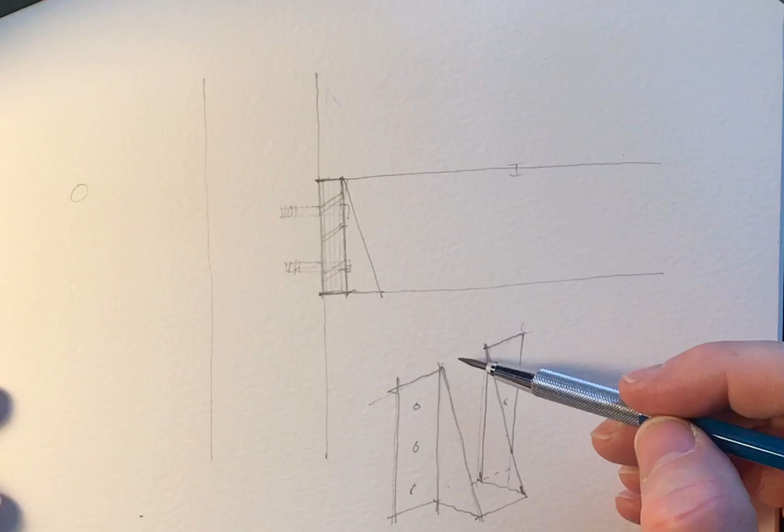And you may remember what a joist hanger looks like. It looks something like this. What it does is it creates a saddle that you can sit your joist into. So it could face mount onto this ledger this direction, and then you can sit your joist into this saddle, however it needs to sit. So that's what this is right here.

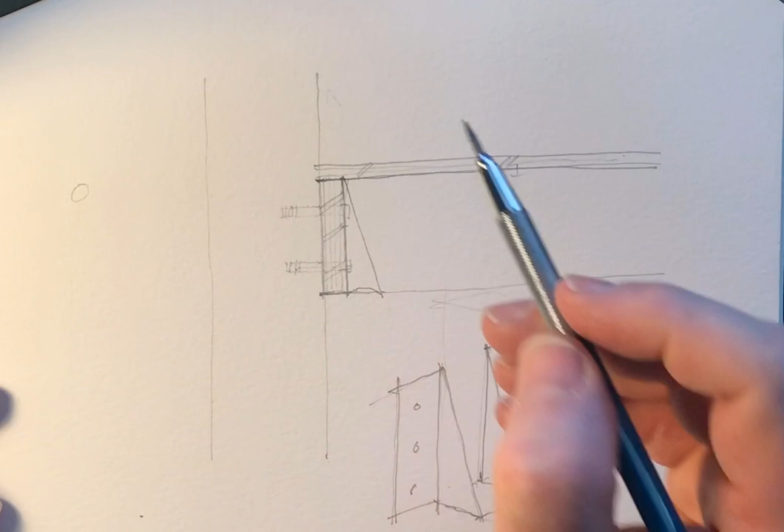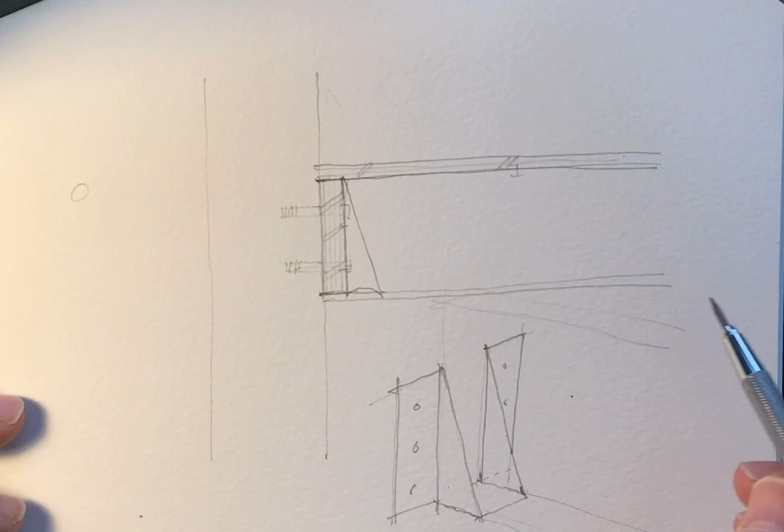On top of your floor joists, then you'll place either 3/4 inch or 5/8 inch floor sheathing, and whatever material you'd like to have on top of that, whether it's carpet or tile. Either way, you might decide that you want some sort of a ceiling material below. Could be gypboard, could be any number of things. If you want to lessen the sound transmission from the loft area or the upstairs to the downstairs, you may decide to put some sort of insulation in here.

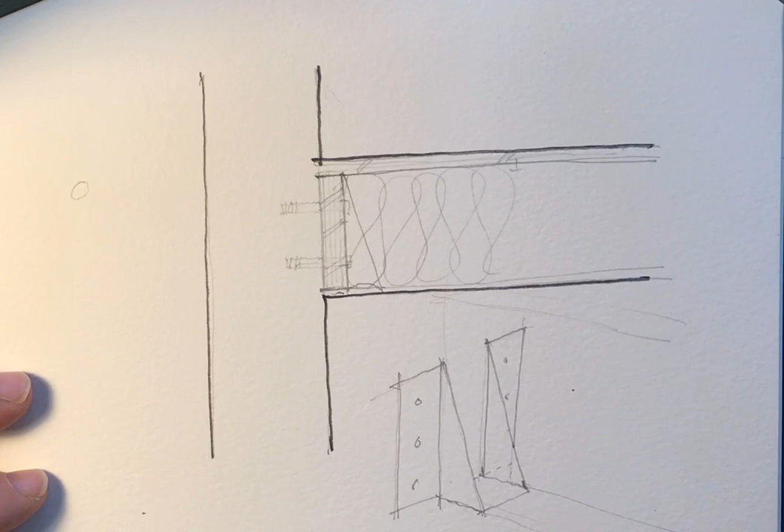Okay, so what we're going to do is give this a profile line. And we're going to beef up some of the lines just a little bit so that we can see the elements of the detail a little bit better. Okay, and we want this hatched so you can tell that it's concrete without having to read anything. We will also go through and label things. So I'm going to just knock out a few things that I want to make sure that you understand you need to label.

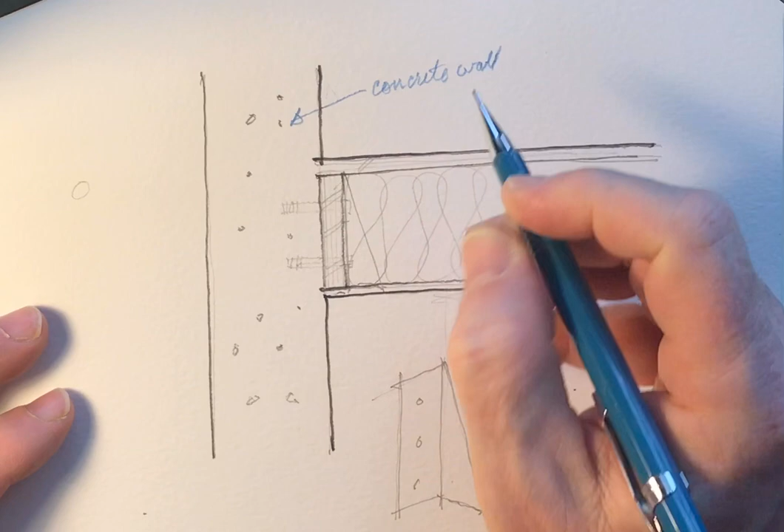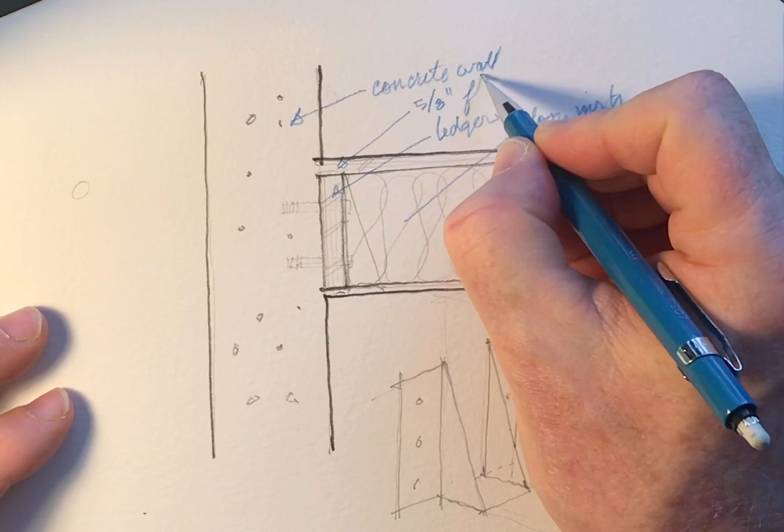Identify this wall. This is your concrete wall. Identify the ledger. Identify your floor joist. Identify your decking, and you can either use 5/8 or 3/4 inch decking. Identify whatever material you decide to put here. Could be 1/2-inch gypboard, would be just fine.

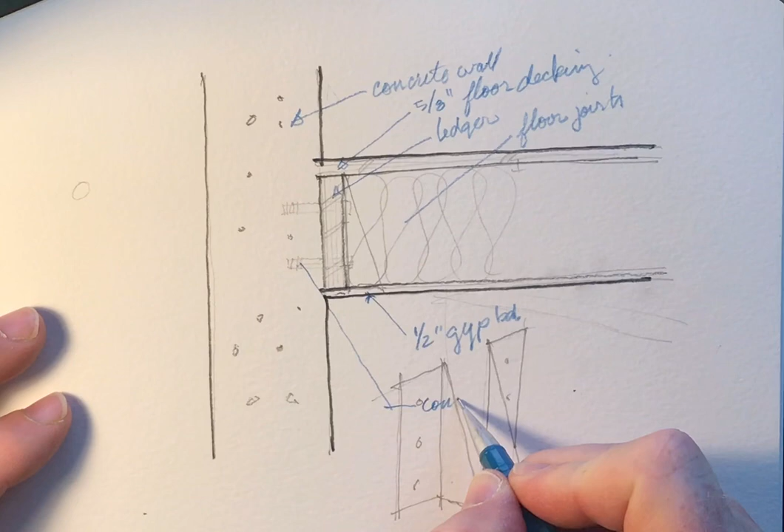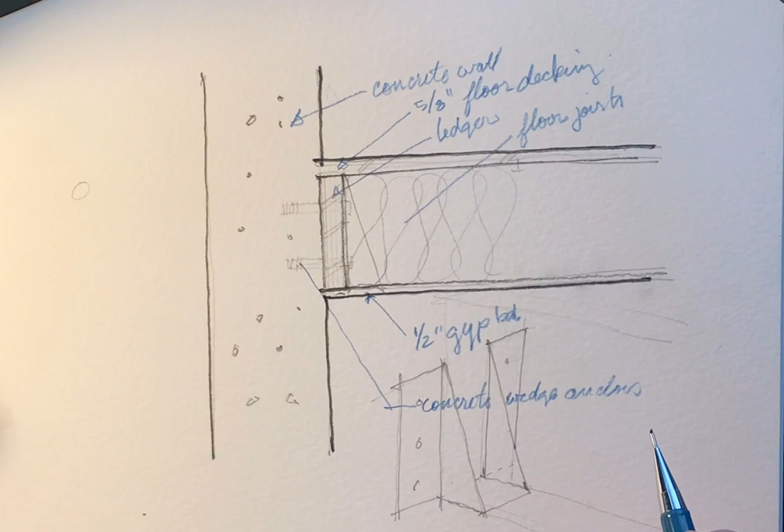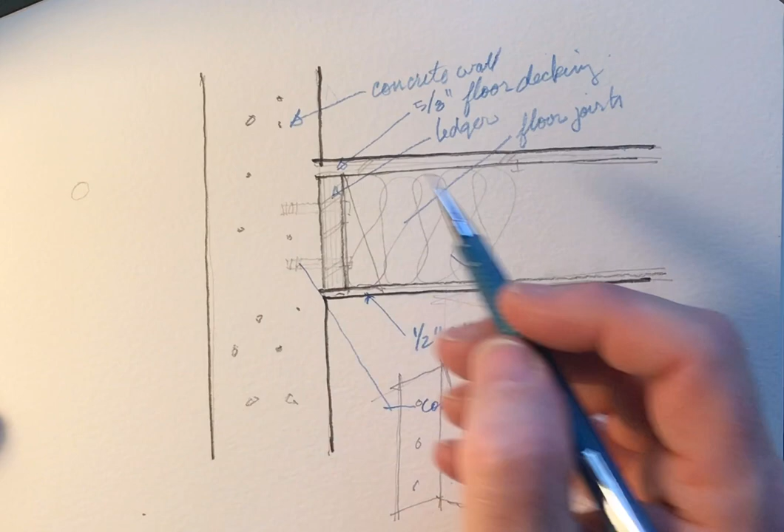You're going to want to call these out as concrete wedge anchors. I suppose you could call them redheads. That's a brand name. You can get these concrete anchors that are called redheads if you want to. Decide if you're going to do insulation, then go ahead and label that. And that should be what we need for this detail. Go ahead and put your section lines in so that it masks off anything that's not needed. And there you go.